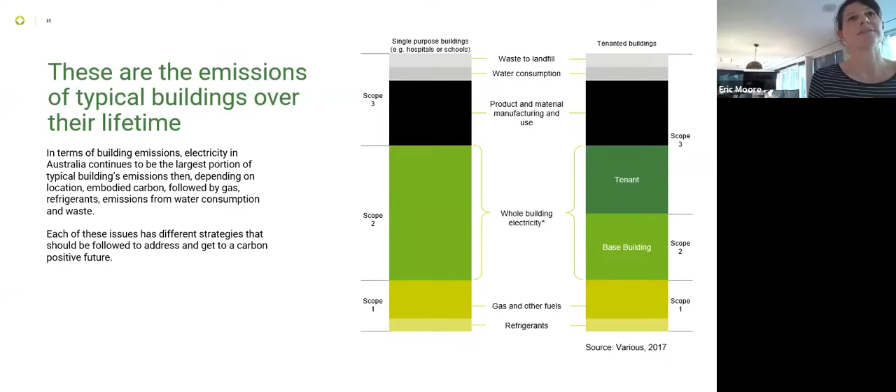I'll talk a little bit about the difference between embodied and upfront. But essentially that is locked into a building at the start of operation, whereas operational emissions you can play with over time. Embodied carbon is something that gets locked in, and those decisions are made early in the piece, and it's very hard to change once the building has been constructed.

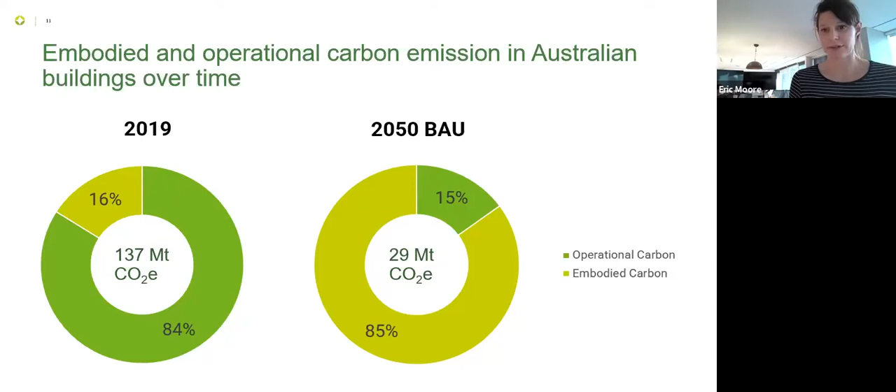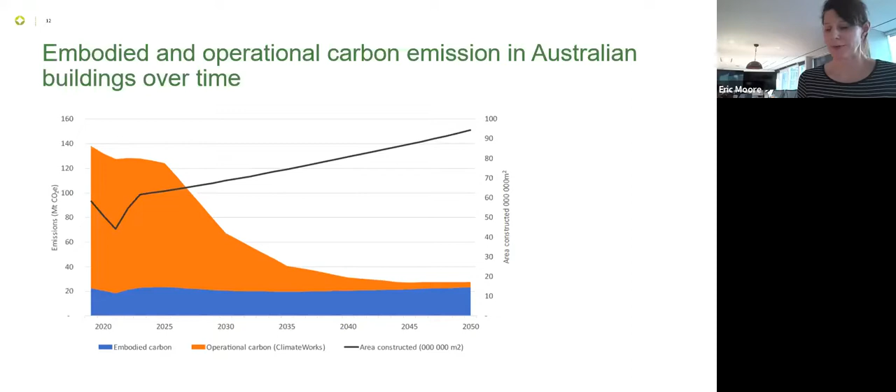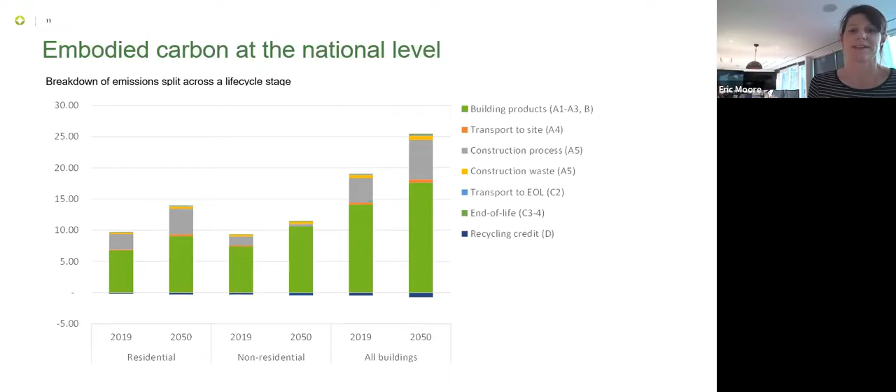Just at a national level, looking at it across the life cycle stage, across different sectors, you can see that building products take up a lot of that embodied carbon. For those life cycle assessment folks amongst us, the A1 to A5, you can see that building products take up the lion's share of those emissions.

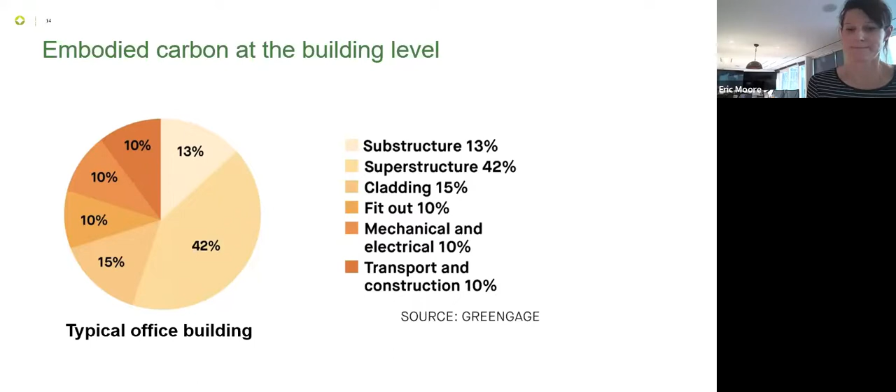She mentioned one day, oh, we've been working with CIBSE on developing this TM65 guidance. It's a calculation methodology for establishing a consistent way of understanding the upfront carbon impacts of services and mechanical systems. We said that's interesting, we've been thinking about this a little bit and we would love to talk to you. So we partnered with CIBSE, and so CIBSE Australia and Integral, to look at how we could bring that to Australia. Essentially looking at taking a standard that was developed for the UK and how we could bring that into Australia, we set up a group of experts.

We had some really robust discussions about how we would develop this particular guide, and we got some great feedback. We've implemented that and we've essentially published TM65 ANZ, which is really exciting. It's definitely the first step in a process, and Matt will talk to you a lot more about the detail of the guide. But we're really excited that we have this opportunity to partner with CIBSE on bringing this specific guide to Australia and New Zealand.

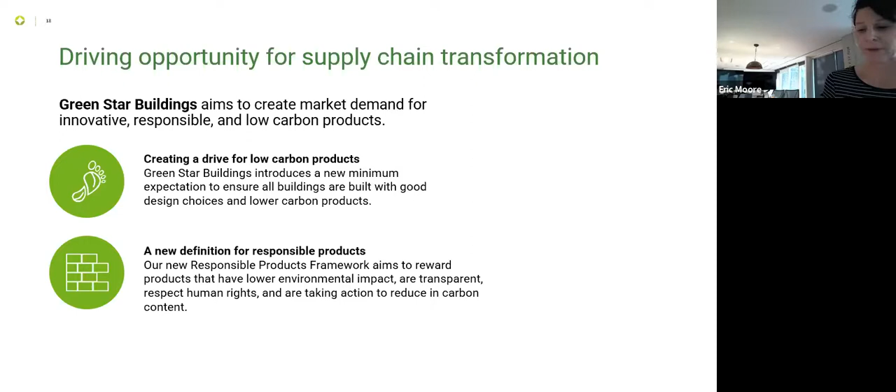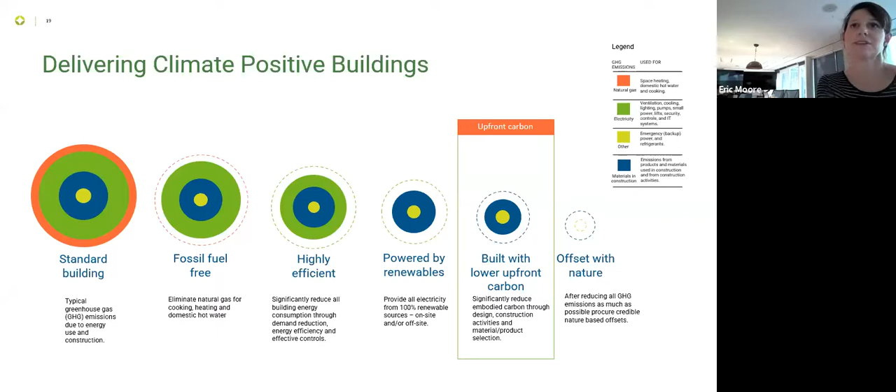As I mentioned, the upfront carbon piece is really one piece of the puzzle of delivering a climate positive building. So when we're talking about climate positive buildings, we're talking about fossil fuel free, highly efficient buildings powered by renewables, built with lower upfront carbon, and offset with nature. It's all about reduction, reduction, reduction until you get to that final bit, and then offsetting.

We recognise upfront carbon and embodied carbon in two different ways. There is the full life cycle assessment that we recognise in Green Star, but I have been banging on about this upfront carbon thing, and that's just to really explicitly say that the upfront carbon is your A1 to A5 modules. That is an important distinction, because although life cycle assessment looks at the whole life cycle, and that is very important, the upfront carbon emissions are what you lock into the building on day one.

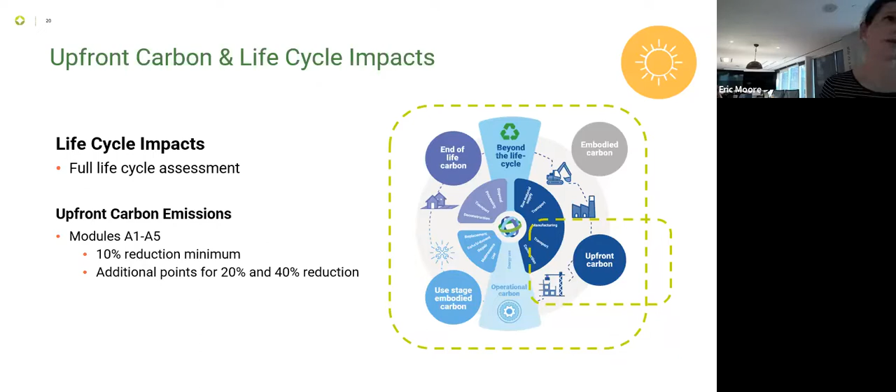So you can make a lot of decisions about what actually goes into a building and affect that upfront carbon profile if you're very conscious about what it is that you're procuring, how you're designing, what you're designing out, etc.

And then this responsible products framework. As I mentioned, it's essentially a set of criteria. We do this by breaking down the building into four key aspects: responsible structure, envelope, systems, and finishes. The reason we do that is because we recognize that for each of those aspects of the building, those supply chains are at different levels of engagement and sophistication in terms of their understanding of being a responsible product.

So responsible structure, for example, has a lot higher benchmarks in that particular credit, because concrete and steel companies have gone a long way to essentially doing a lot. Partly that's because they have very simple supply chains and a much more controlled manufacturing process. It's an easier thing for them to do.

Systems, however, we essentially established that that is a huge area for improvement. So the benchmarks under systems are a lot lower.

So as I mentioned, it's essentially about looking at, against the framework, how you perform against this category. I'm not going to go into detail about that, only to say that under the section here of positive, we will recognise anybody who goes and talks to their manufacturer, does a TM65 assessment, and reports that back to CIBSE.

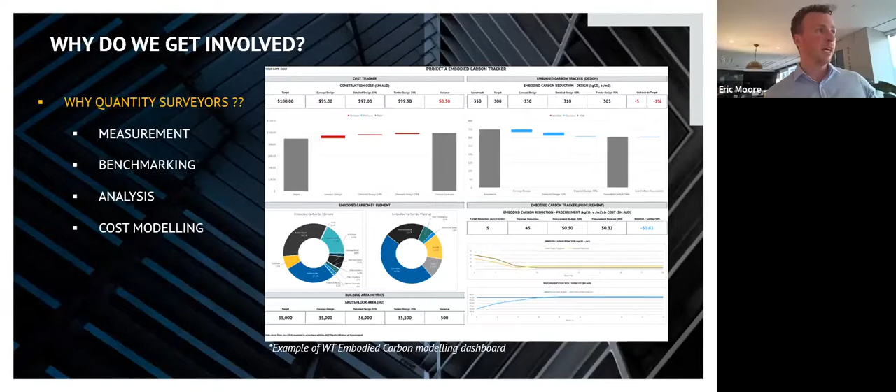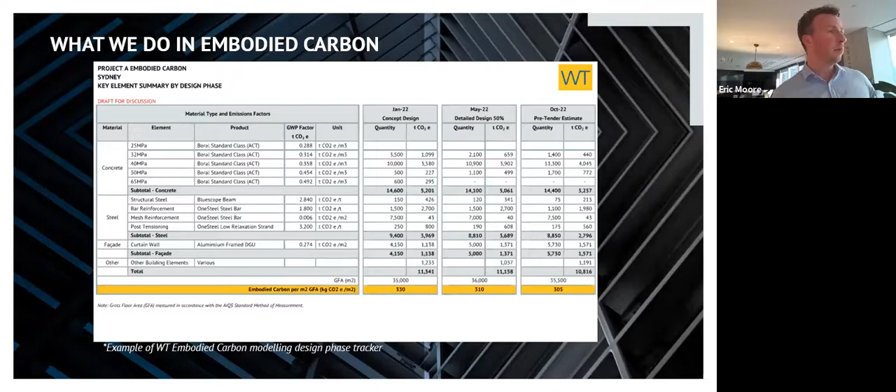On the right of the screen is an example of an embodied carbon dashboard we produce. It steps through the cost at each design phase, the embodied carbon content, embodied carbon in your building elements, and your procurement reduction. This is another part of the report we produce - it steps through the design process and talks to the embodied carbon content in the various building materials.

Another issue is that because this is emergent science, the industry is not fully across what we do as QSs, but what we're trying to do in the broader picture. Everyone's saying we need to reduce our embodied carbon, but some people don't know what it is and how to reduce it. One of the biggest issues is that we don't have an industry-set standard here in Australia for the reporting and measurement of embodied carbon. I know NABERS is currently working on that - I think they'll provide an update to the industry for comments towards the end of this year, and hopefully a finished product by the middle of next year.

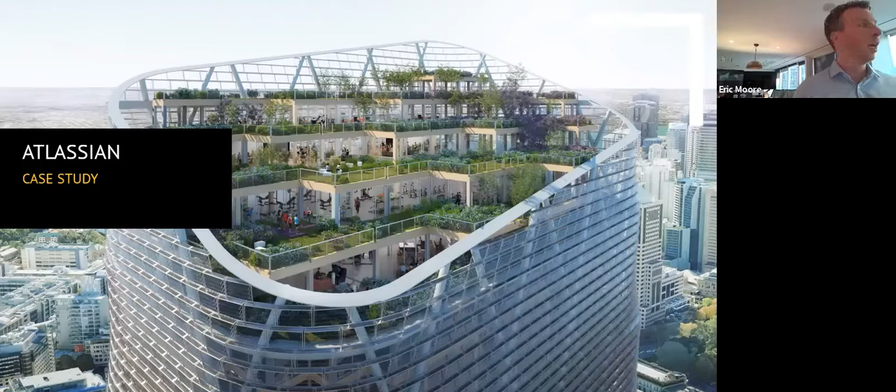So the Atlassian project - I will say before I start that I was not directly involved. The embodied carbon piece on this project was very much a collaborative effort between the engineers, architects, building owners, full design team, and builder. And there are very strict confidentiality agreements in place on this project, so I can't go into too much detail.

But what I can say is it spent 6 years in design. Construction started on site in August, I believe, and will run for 4 years. The target embodied carbon reduction from the preliminary design was 50%, so there was a need to set a benchmark.

Atlassian is not purely a timber frame building. It's a hybrid frame, concrete and steel, with timber floors as mid-spans. On this project, approximately 85% of the embodied carbon calculated was in the superstructure and facade.

So the focus to reduce those elements was on the use of cement replacement products and the use of green steel. The thing with green steel is there's only a handful of countries out there that produce it, so what you may benefit from going with green steel may be squandered getting it to Australia because distances are so huge.

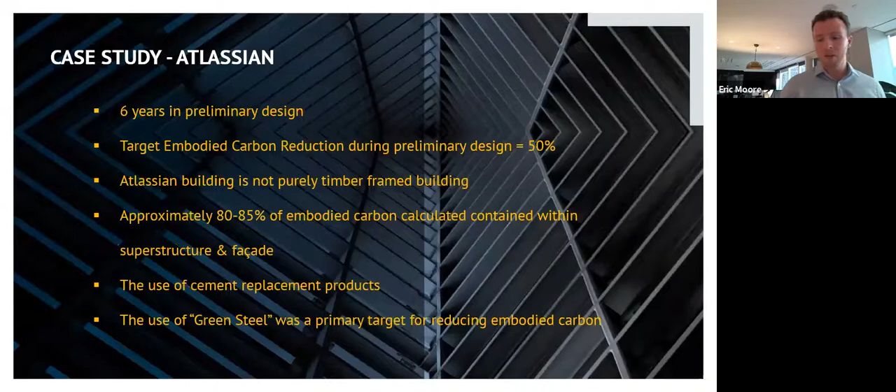And I think that's it for me, short and sweet. I'll hand it over to Eric.

Thank you, Egon. Couple of takeaways for me in that one.

Go have a chat with the quantity surveyors - they're used to dealing with data and they're in safe hands. We are looking at carbon assessments for them.

And I particularly like the discrepancy in numbers for glulam timber, to be absolutely honest. I think that was a 2,300, like a minus number, all the way up to 1,700. That was a fairly substantive discrepancy between the two.

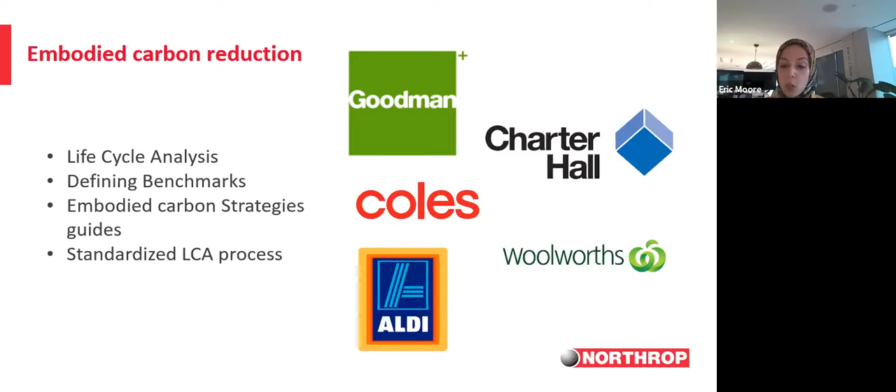But the thing is, we do have the experience and understanding for different building elements, and have been doing that for some time. The part that is really tricky, and was always treated as a big closed box, treated as a whole, was the building services elements. The reason for that is that building services can get really complex.

So we know that there are two aspects for carbon in building services: operational carbon and embodied carbon. With operational carbon, we know that we're talking about energy efficiencies - we know how to do it. But when we come to embodied carbon now, the conversation lately has been a lot about refrigerant gases, using natural refrigerant gases.

But when it comes to the materials, it gets a bit complicated. We don't have enough information about the quantities in building services materials. Where are they coming from? What are their actual impacts? Because I work with a wide range of engineering disciplines in Northrop, I understand the struggle in getting accurate information about different materials. That's why we actually need a framework to guide the whole industry on how to improve these environmental outcomes, at least in building services.

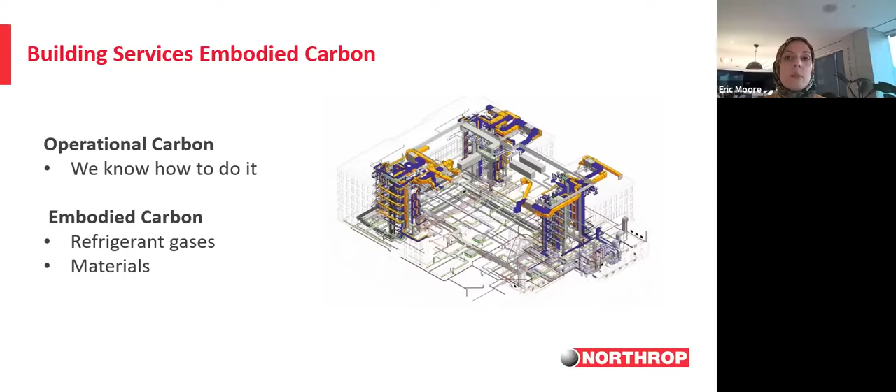So the main thing is that we need to first understand the information, understand what we have, what we're dealing with, and then we get this information and analyze it. After analyzing this information, then we can improve outcomes. Without these three steps, it's really hard to achieve better outcomes. I'm going to explain more about these three steps.

When we talk about understanding, we face two things. First is transparency. The problem in this area is there is a lack of public data about building services materials - where they come from, quantities, what they actually include. Without that information, we will not be able to improve. We also need incentive for people to share that type of information.

Another tricky part is that building services can really be complex, and all of these components are really complex. From experience, complexity really drives people away from understanding. It's too complex, I don't want to look into that. Because of that, we need to simplify the approach. We need something to help us with a simple approach to collect data, to calculate the impacts, and then we should provide flexibility also about the amount of detail that can be included. We shouldn't be forcing people to dig really deep into that.

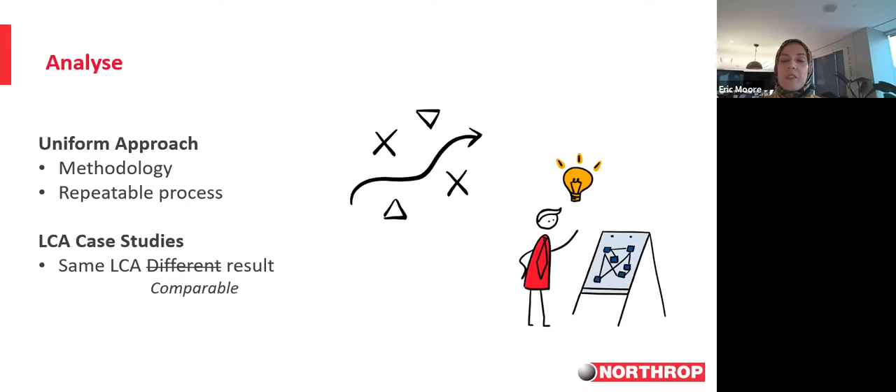We're not trying to persuade everyone to use the same source, but at least we can refer to one thing using the TM65. Only then can we have comparable results. So instead of having completely different results, we have comparable results. We can look at the results and start analyzing. And when we have that framework, it can be repetitive after that.

So basically the TM65 is about transparency, it's about a uniform approach, it's about flexibility. We're not trying to solve everything at once. We're just trying to focus on one problem right now to fix it instead of struggling with different aspects. We're also trying not to make the perfect the enemy of a good outcome. We're just trying to agree on an approach to use by everyone.

And we're getting some success, a lot of success actually, with the TM65 being adopted by Green Star now, and NABERS in their new tool about embodied carbon - that's a sneak peek, they're going to actually use it. A lot of conversation happening on this one.

Once we get all of this applied, then we can actually look at improvements, because we're going to have actual benchmarks. We can have benchmarks to compare against, benchmarks to improve against, and then we're measuring success against fixed numbers.

But that also cannot happen without industry collaboration. By using one uniform approach, everyone would feel safe sharing their knowledge, because we're referring to one source of truth. So sharing knowledge and trying to improve outcomes can only come by the whole industry gathering together to try to get better outcomes.

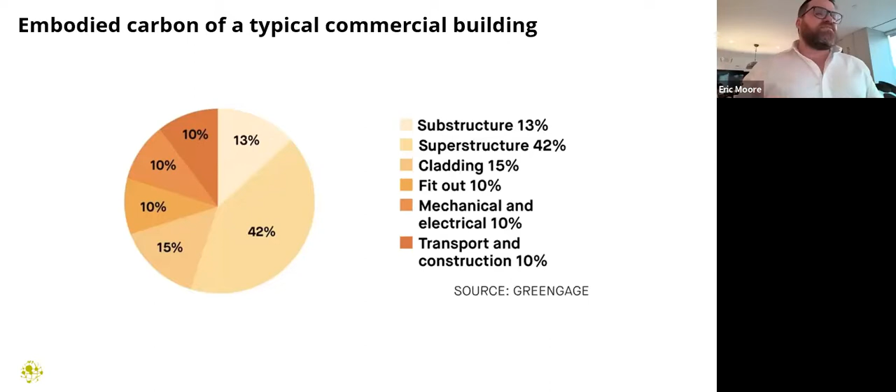What is the problem that TM65 has been created to try and solve? Well, just stealing one of Taryn's slides, which she did source elsewhere - sourced from Greengage, a UK organisation - but this shows that in a typical commercial building, services are around 10% of the embodied carbon. But as Taryn mentioned, that is at best an educated guess. And why is that? Well, the problem we've got in the building services industry is a lack of data, a knowledge gap.

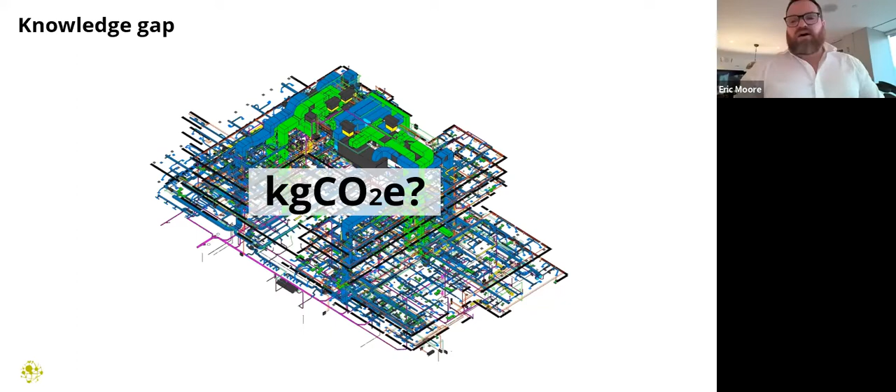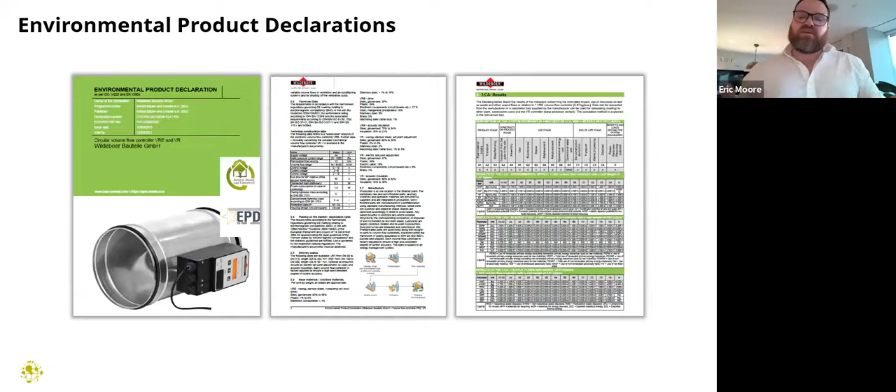Regarding building services products, environmental product declarations, or EPDs, are the global standard for product lifecycle impact declaration. An EPD is a standardized way of disclosing these environmental impacts, including embodied carbon, and it's a really rigorous, consistent, and peer-reviewed methodology. But as has been mentioned, there are only a handful of building services products that actually have EPDs, and that's because they can be quite expensive and time consuming to produce. When you consider that a lot of the suppliers we deal with have a huge range of products, that's a very daunting task to try and create EPDs for a full product range.

And we are really interested in understanding the embodied carbon impact of services because they are potentially very high impact. First of all, there's lots of stuff in a building - in a 2-story, 2,000 square meter building, it's not uncommon to have 20 to 25 tons of services equipment when you add it all up. There's a lot of material there. Also, services equipment uses high impact materials - metals like aluminium and steel, synthetic refrigerants. And the other big thing is the high replacement rate. So the initial upfront impact of services may be 10%. We know that most of that upfront impact is in the building structure, but the building structure hopefully lasts for the whole building life, whereas services equipment is replaced periodically at 5 to 20-year periods, depending on what the component is. So when you think about embodied carbon and that repeated impact over the life cycle, services can be huge.

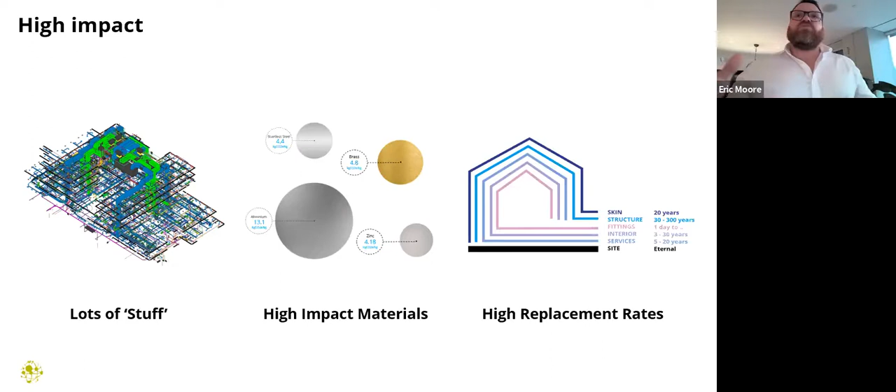So this is why TM65 was written. My colleagues in the UK, at Elementa, who are our sister company in the UK, wrote TM65 to tackle this problem - a lack of data, a potentially high impact sector of building services, and our urgent need to understand, measure, and reduce embodied carbon within buildings.

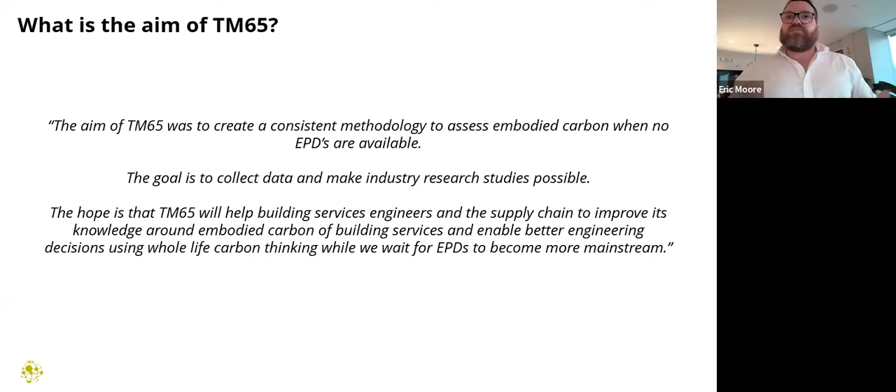So what is TM65? The aim of the TM65 methodology was to create a consistent methodology to assess embodied carbon in building services equipment when there are no EPDs available, which is most of the time. The goal is to collect data and make industry research studies possible so we can start to understand our impacts as a sector. The hope is that TM65 will help building services engineers and our supply chain to better understand our embodied carbon impact, and enable better engineering decisions so we can use whole life carbon thinking to influence our decisions while we're waiting for EPDs to become more mainstream.

So TM65 is a method for estimating embodied carbon in building services equipment. It's a first step to promote transparency in the supply chain. Our suppliers have not traditionally been asked about embodied carbon. This is starting a conversation.

It's a simple, replicable standard, but what it's not is a whole life cycle assessment at system level. It's not an environmental product declaration, EPD, and it's not trying to be. This is definitely a stepping stone on the way to an industry that needs to produce more EPDs, but it's not going to do that in the immediate future.

And it's not a method for comparing the embodied carbon of product A and product B. That's a really important point - we shouldn't use this method to collect data on, say, a heat pump from one manufacturer and then another and compare the embodied carbon, because you need an EPD to do that. You need the rigor and detail of an EPD. This is about collecting industry-wide data.

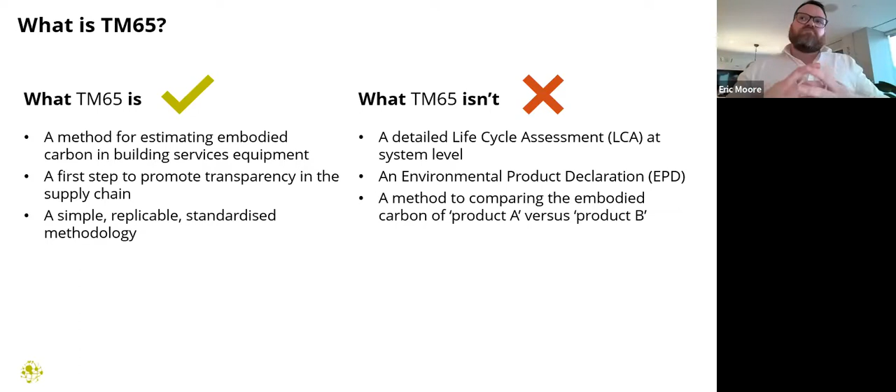So how does the TM65 calculation fit into a whole of life carbon assessment? When we talk about whole of life carbon of the building, we're talking about all the embodied carbon and all the operational carbon over the life cycle of the building. TM65 sits in the embodied carbon part of that. It doesn't consider operational carbon, and it just looks at building services. So everything else - structure, facades, internal finishes, all the other materials - doesn't consider those.

And then even within building services, it's just looking at product level. So it's not considering the quantities of products in a building, so the system. It's not considering the service life. It's just looking at the products, individual products.

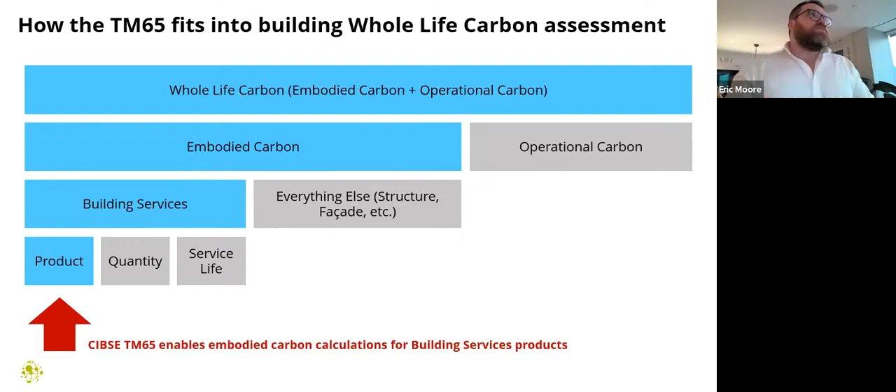So what's the process? It's fairly straightforward. There's a 3-step process. The first step is data collection, so data is collected from manufacturers through a questionnaire form. Once you've received that data, we undertake calculations. There are 2 calculation methods, depending on the amount of data you can get from your supplier - a basic calculation and a mid-level calculation, which is obviously a little bit more detailed. And then the final stage is reporting.

This is the most important part of this, because this is about collecting data from the industry. So reporting the results back to CIBSE, so it can be entered into a database, and then we can look at trends and patterns in the data - that's probably the most important part of this process.

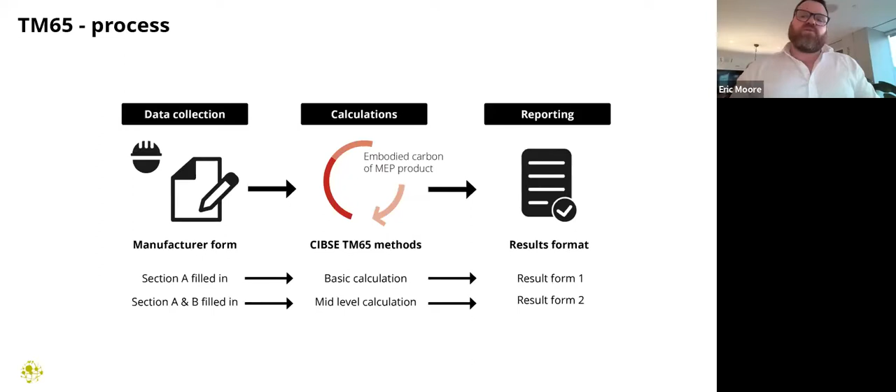Just to show basic versus mid-level versus an EPD - obviously the basic calculation is fairly easy, the mid-level calculation is a little bit harder, but nowhere near as hard as a full EPD. In terms of manufacturer involvement, very little is required for the basic level TM65 calculation, a bit more for the mid-level calculation, and an EPD is much more of a commitment from the manufacturer. The level of detail also steps up as you go from basic to EPD.

The reason we think this is a really good conversation starter for suppliers is that it doesn't involve that level of commitment and involvement that an EPD does. I think if you went to a building services equipment supplier now and asked for an EPD, you wouldn't get much traction, to be honest, because it will be a lot of cost, time, and resources. Whereas this is a way where we can start to understand embodied carbon through much less effort, in a way.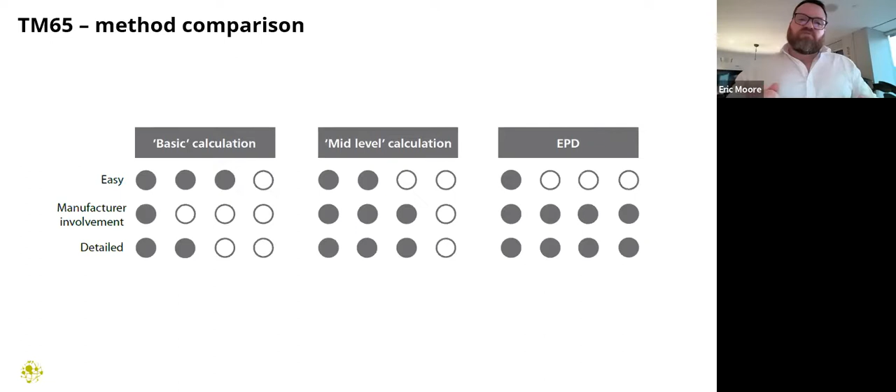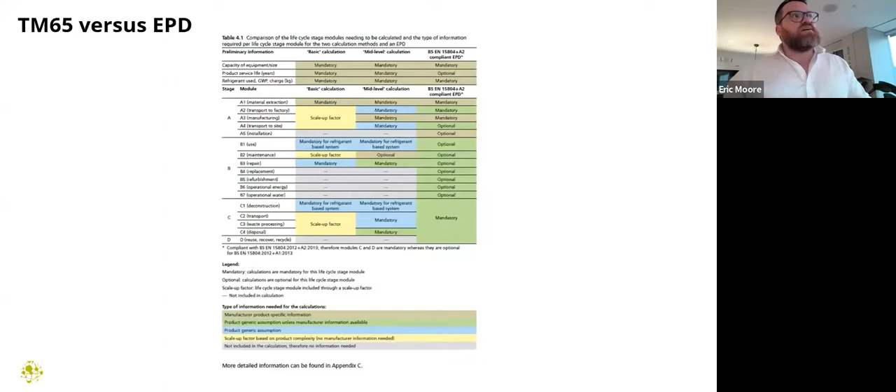There is, I'm not going to go into this now because it's really complicated, but there is in TM65 a really detailed comparison of the inputs and the data required for each of the two calculation methodologies versus an EPD, which, if you're into that kind of thing, is quite interesting, because it really just shows the difference in the amount of data required and the rigor involved in each of these methods.

So going back to this three-stage process, how do you do TM65? The first stage is data collection, done through this manufacturer's form. There are three sections, A, B, and C. Section A is essential information, covering standard product information you could probably get off a data sheet, other than one item highlighted there, material composition breakdown. This is where the manufacturer will need to do a little work to understand, by weight and by type, the material breakdown of their product.

So that's essential information. Without section A, you can't do TM65. Section B is supplementary information, a bit more detail on things like factory location, how much energy the factory uses to produce the product, and where they source components from. That's not mandatory, but you need it to do the mid-level calculation. So to do the mid-level calculation, you need sections A and B completed.

Section C is totally optional at the moment, and looks at broader impacts, such as the annual waste output of the factory where the product's made, annual water consumption, and how much renewable energy that factory is using. This is optional currently, but it's being requested to help develop future iterations of TM65. Section C is not included in the current calculation methodology, but it can help develop future versions.

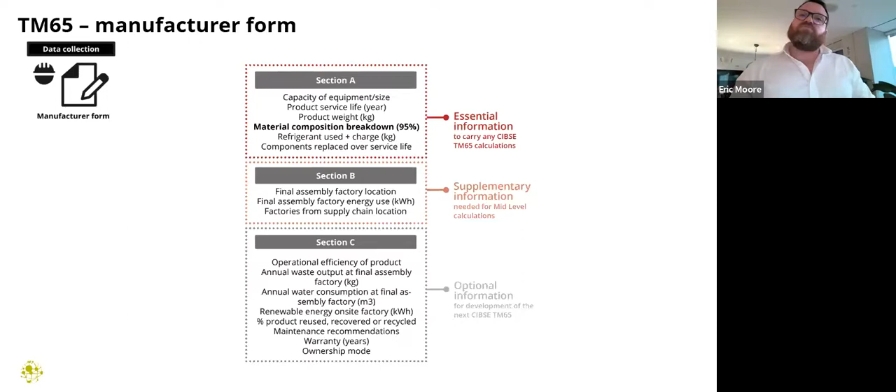Now for these calculation methods. Once we have the data from the manufacturer, if they've only given us section A, we go ahead and do the basic calculation, which is fairly basic. Step one is to take the material breakdown from part A of the manufacturer form, and multiply each of those materials and quantities by a carbon factor, based on the material extraction, so the raw material extraction embodied carbon.

Second step is a calculation for life cycle stage B3, which is repair, essentially spare parts required for that component through its life cycle. If we don't have detailed information on that, we assume B3 is 10% of the initial A1 material extraction carbon - a high-level assumption that can be used without detailed data.

Then step 3 is a scale-up factor. This accounts for all the other parts of life cycle stage A, B, and C, such as disposal, that we haven't calculated in steps 1 and 2. This varies based on product complexity, so more complex products have a higher scale-up factor to allow for additional manufacturing processes, additional transport, and all that stuff. Then step 4 is a buffer factor of 1.3.

This is because we want this method to be highly conservative. We don't want to be underplaying the carbon impacts of these products, so that's a safety factor in effect. Then step 5, we include the refrigerant impacts - the use stage impacts, so any leakage that might occur, and then the end of life processing of those refrigerants. And that's it. That's the basic method. It is fairly straightforward.

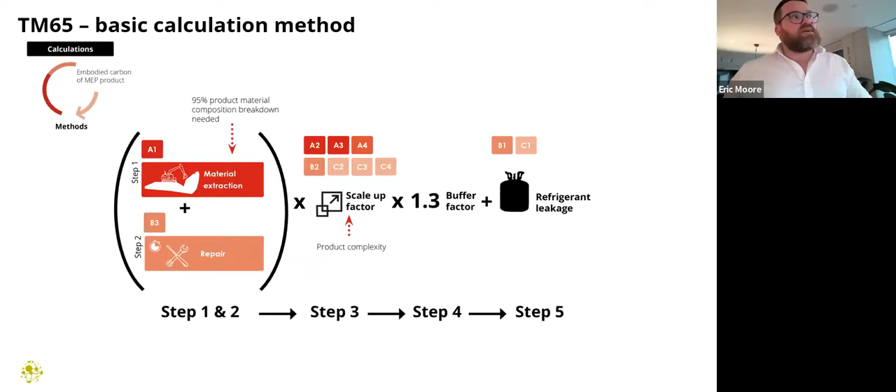The mid-level calculation is a bit more complex, as the name would suggest. Step 1, whereas before we just looked at A1 material extraction, we still do that, but now these other parts of life cycle stage A, such as the transport of materials and the manufacturing process itself, are actually calculated in more detail based on the data collected in section B of the manufacturer's form.

And then the same with the end of life in step 2, life cycle stage C. Previously, that was all included in the scale-up factor. Now we actually look at location, distances travelled, local waste processing processes, and things like that in more detail to calculate the end of life. Then the repair stage, which previously was based generally on 10% of A1, is now actually calculated for every single component that's replaced within the product life. You actually undertake steps 1 and 2 for that individual component.

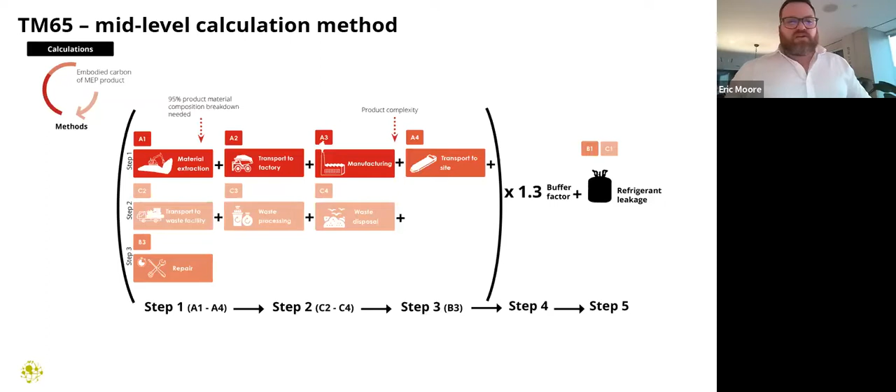So there's quite a bit more work in that. Steps 4 and 5 are the same. We have a buffer factor of 1.3 to allow for that, to make sure this calculation is conservative. And then we add on refrigerant leakage impacts and end of life. So a bit more to do in that one, a bit more information required.

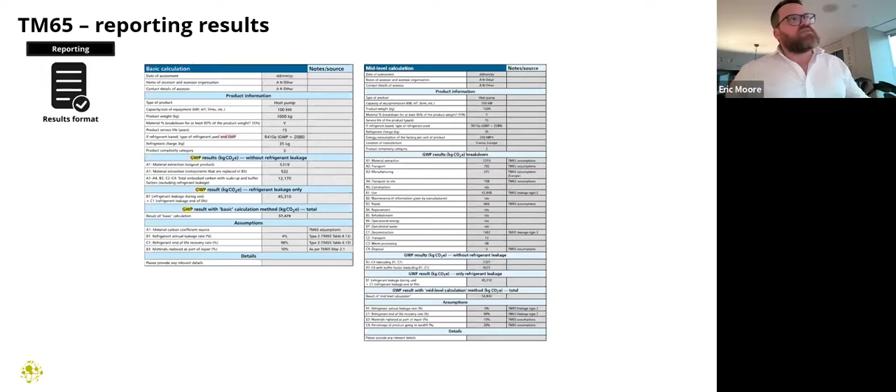And then the final stage, again probably the most important bit, is getting this information back to CIBSE. Depending on which calculation method you've done, basic or mid-level, there's a different reporting form. But there's been a lot of work put into making these quite consistent so that the data can be easily sent back to CIBSE for analysis.

And just to give you a bit of an example of these two calculation methodologies, we took - you can't see the title there, but it's a 542 kilowatt heat pump. We got manufacturer data for sections A and B of the manufacturer form, and then undertook a basic calculation and a mid-level calculation. So you can see that the basic calculation on the top returns a more conservative embodied carbon number, as you would hope from a basic calculation.

And you can see the impact of that scale-up factor there. We haven't actually got many inputs - it's just A1 and B3, material extraction and repair. The rest is done with a scale-up factor, and then we have the buffer factor.

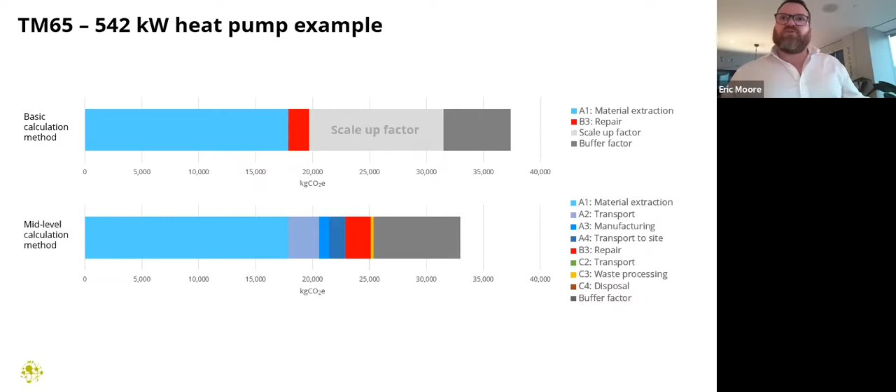For the mid-level calculation, you can see how that returns a slightly lower, but probably more accurate embodied carbon assessment because of the more granularity of the calculation and the lack of the scale-up factor. But you can see how those different kind of results compare. So hopefully, if you can get the information, the mid-level calculation will provide you a lot more insight, detail and accuracy. And you would expect an EPD would return a lower embodied carbon impact than the mid-level calculation because it's gone to the next level of detail.

So what can we do with all this product level data? We've already said it's not really for comparing product A to product B. So what do we use it for? Well, ultimately, we want to generate system level assessments using this data. So an example of this is TM65.1, which is the embodied carbon of building services in residential heating systems, which was released in the UK earlier this year.

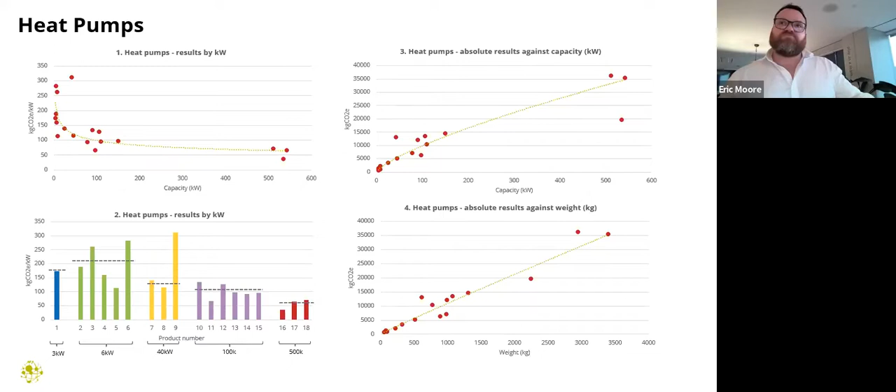And what they've done with the product data is actually looked at trends. This example - I'm not going to go through these graphs in detail - but this shows the relationship for heat pumps of embodied carbon in kilograms of CO2 versus the kilowatt output of the equipment, or the kilogram weight of the equipment. You can see how we can start to develop trends and curves that describe embodied carbon versus certain other equipment parameters. And when this data was looked at over heating systems, products for space heating and domestic hot water heating ranged right down from 3 kilograms of CO2 per kilogram of equipment weight right up to 21, but the average was 9. So it gives you these benchmarks that you can start to use early in your design to understand what the impacts of a system would be.

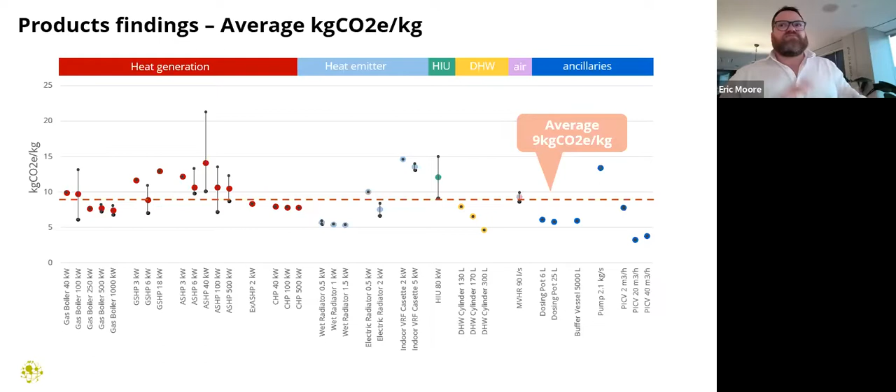And when you take benchmarks like these for different system types, and you combine that with energy modelling, we can start to create a whole of life carbon profile for buildings quite early in the design process, and refine that as we go through each design stage.

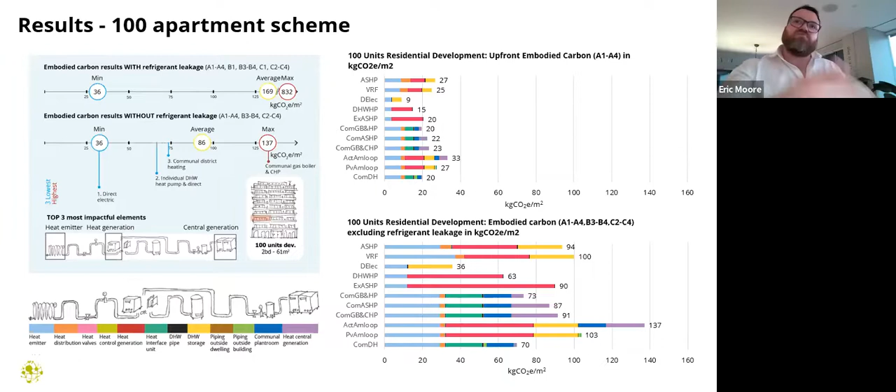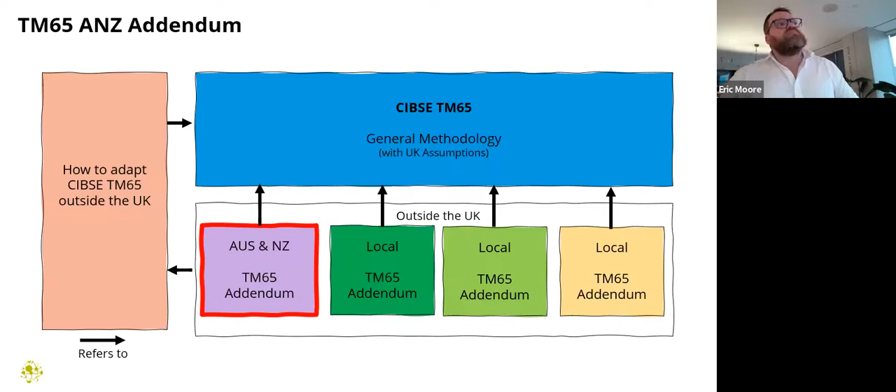So how do you use TM65 in Australia and New Zealand? As Taryn mentioned, Elementa, our sister company in the UK, the Green Building Council of Australia, and CIBSE ANZ have recently authored the TM65 ANZ addendum. So TM65, the original UK document, is still the basis of the calculation. And to use the addendum, you read an additional document called How to Adapt CIBSE TM65 outside of the UK. The reason that's been done like that is, as you can see, although the ANZ addendum is the first, there are future ones currently being developed and planned. So it allows a bit of flexibility, and allows these addenda to really just focus on the actual changes required in the calculation methodology to make them regionally useful.

Sorry, pressed the wrong button there.

So what were the changes in TM65 for the ANZ addendum? Well, for the basic calculation, the only change was the refrigerant leakage scenario. Because it's such a basic calculation, we're just looking at raw materials and repair and refrigeration leakage. The rest is done through buffer factor.

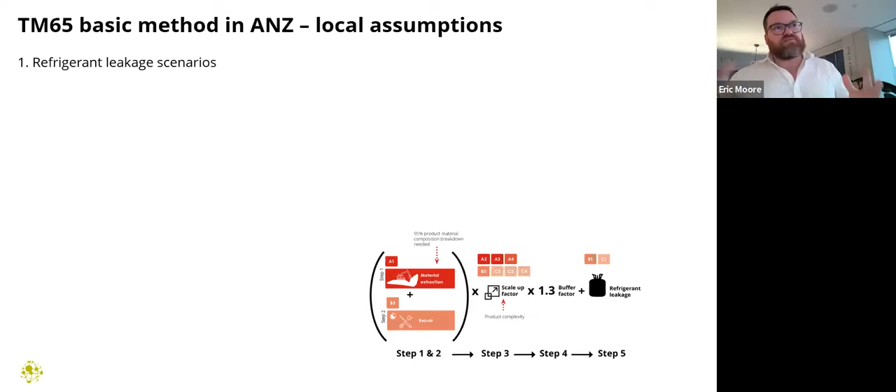So the refrigerant leakage scenario is slightly different in our region. We make a different assumption compared to the UK regarding leakage over the life cycle and at the end of life, how refrigerants are dealt with at the end of life.

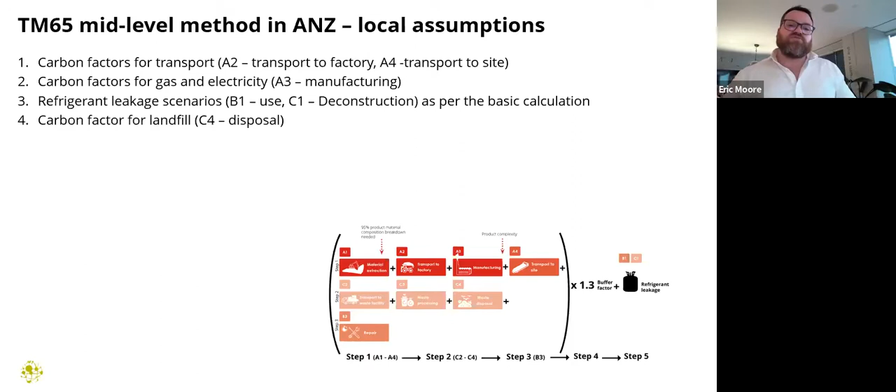Again, the refrigerant leakage scenarios were changed, but that's as per the basic calculation change. And then finally, the factors for disposal, the end of life products was changed to reflect our waste handling practices in this region.

So what's next for TM65? Currently, CIBSE is working on updating an Excel tool so that all these calculations we talked about earlier can be done automatically with the local ANZ addendum data, so you don't have to do it by hand.

But long-term, the vision is to create a web-based tool so that manufacturers can input their data directly and cut the consultant out, which is great for us because it's less work, but it also helps to keep the data anonymous as well because it's going through less hands. But that's under development, not available yet.

And then in the UK, as I mentioned, TM65.1 was an assessment of residential heating systems. Currently, my colleagues at Elementa in the UK are working on TM65.2, which is looking at embodied carbon of HVAC strategies for offices, again in a UK context.

But ultimately, once we start collecting data in our region, this is the kind of studies that we need to produce for systems relevant to our building typologies here. We use different systems than they do in the UK, and we need to build up an understanding of those systems in terms of embodied carbon.

So just a few key takeaways. We need to understand, measure and reduce embodied carbon. I think we all understand that. Building services is currently a real grey area, complete lack of data and transparency in the sector. And TM65 provided this methodology to benchmark equipment, establish industry averages where we haven't got EPDs available at the moment.

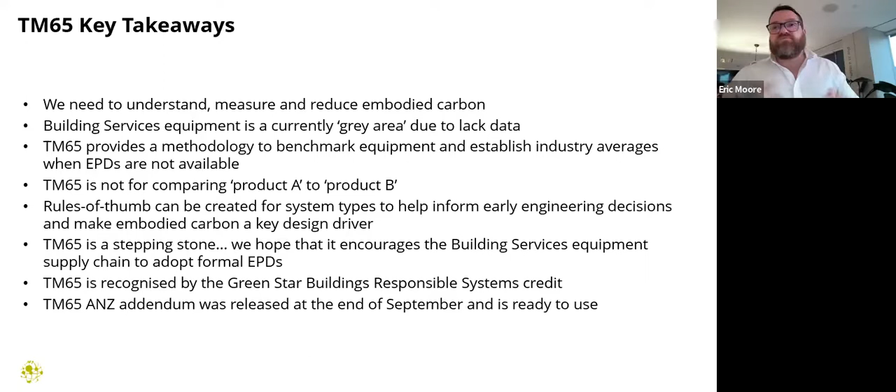And finally, the ANZ addendum was released at the end of September, so just at the end of last month, so it's ready to use, and we encourage you to do so because we really do need to start to understand the impact of our designs, to be able to measure them and then hopefully in the long term reduce our impact. Thanks.

Well, I'm not going to try and even try to summarize what you're going through there. So well done. Thank you very much for that.